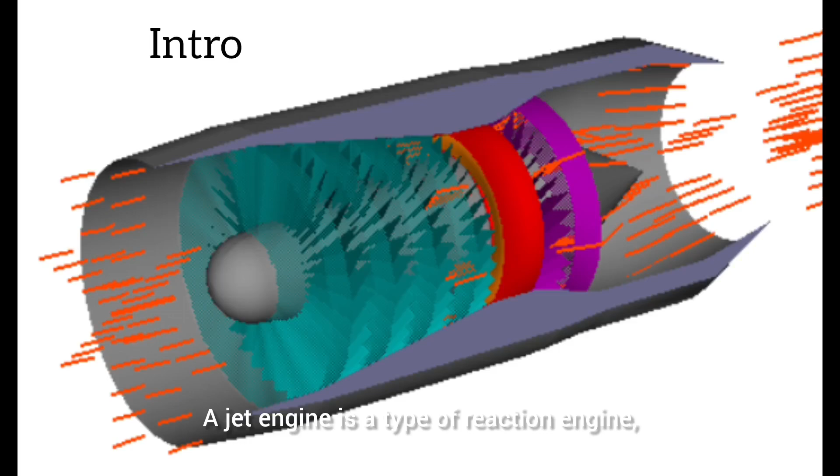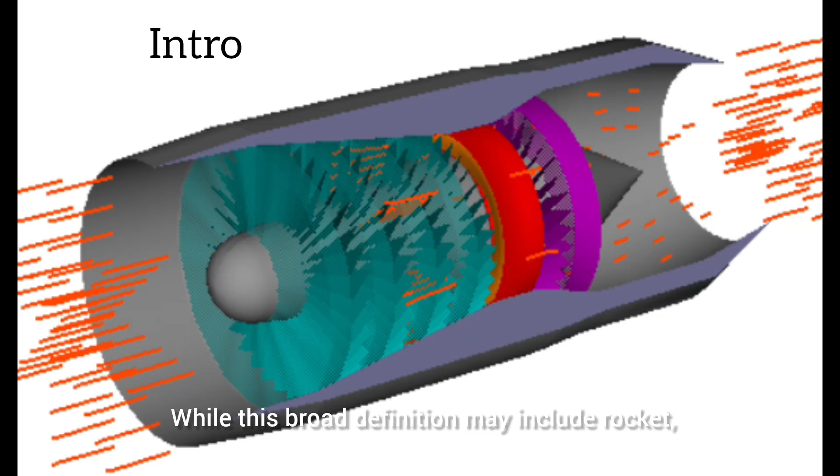A jet engine is a type of reaction engine, discharging a fast-moving jet of heated gas, usually air, that generates thrust by jet propulsion. While this broad definition may include rocket, water jet, and hybrid propulsion, the term jet engine typically refers to an internal combustion air-breathing jet engine such as a turbojet, turbofan, ramjet, pulse jet, or scramjet.

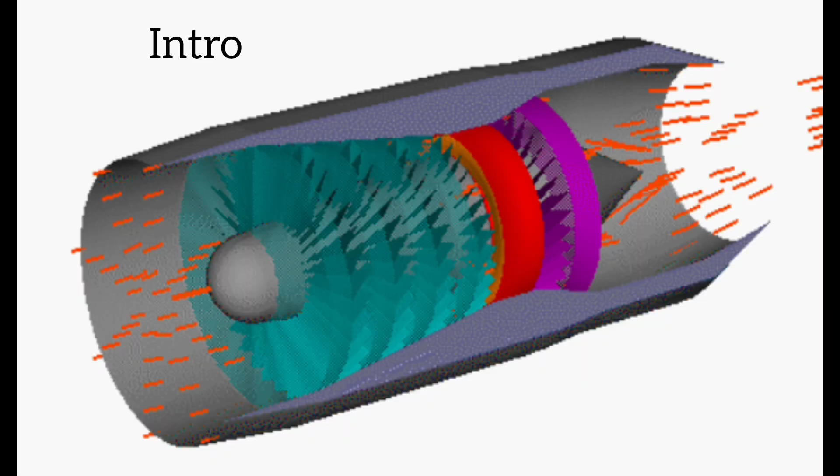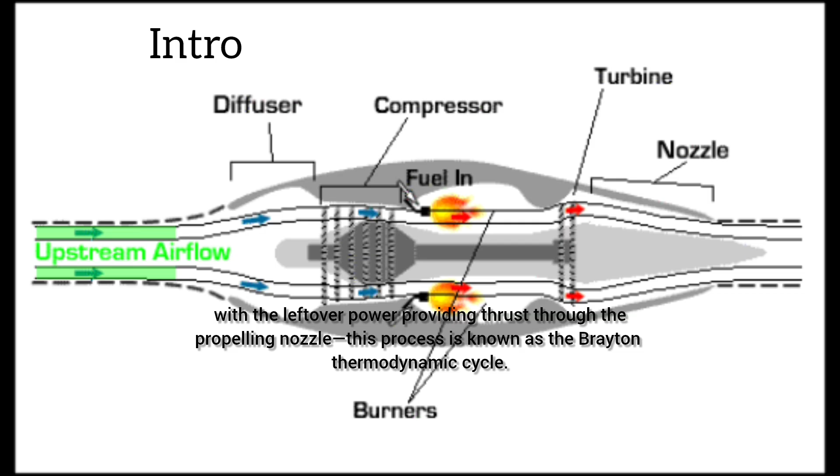In general, jet engines are internal combustion engines. Air-breathing jet engines typically feature a rotating air compressor powered by a turbine, with the leftover power providing thrust through the propelling nozzle. This process is known as the Brayton thermodynamic cycle. Jet aircraft use such engines for long-distance travel.

Early jet aircraft used turbojet engines that were relatively inefficient for subsonic flight. Most modern subsonic jet aircraft use more complex high-bypass turbofan engines. They give higher speed and greater fuel efficiency than piston and propeller aero engines over long distances. A few air-breathing engines made for high-speed applications, ramjets and scramjets, use the ram effect of the vehicle's speed instead of a mechanical compressor.

The thrust of a typical jetliner engine went from 5,000 lbf (22 kN), de Havilland Ghost turbojet, in the 1950s to 115,000 lbf (510 kN), General Electric GE90 turbofan, in the 1990s, and their reliability went from 40 in-flight shutdowns per 100,000 engine flight hours to less than 1 per 100,000 in the late 1990s.

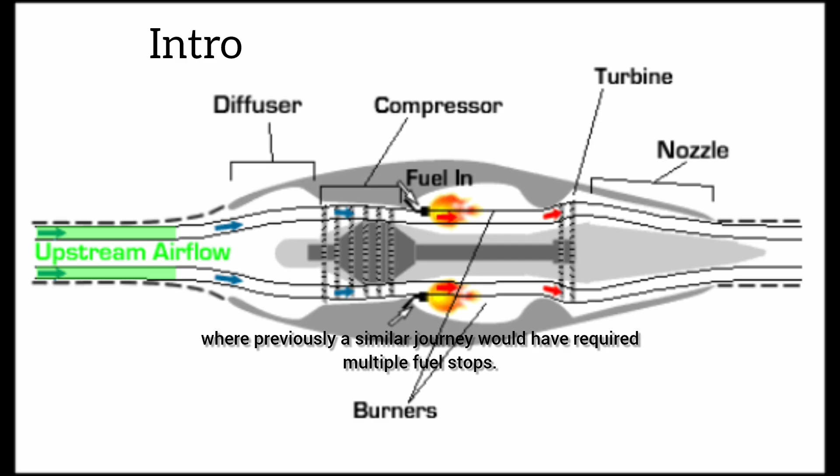This, combined with greatly decreased fuel consumption, permitted routine transatlantic flight by twin-engined airliners by the turn of the century, where previously a similar journey would have required multiple fuel stops. The principle of the jet engine is not new. However, the technical advances necessary to make the idea work did not come to fruition until the 20th century.

A rudimentary demonstration of jet power dates back to the aeolipile, a device described by Hero of Alexandria in 1st century Egypt. This device directed steam power through two nozzles to cause a sphere to spin rapidly on its axis. It was seen as a curiosity. Meanwhile, practical applications of the turbine can be seen in the water wheel and the windmill.

Historians have further traced the theoretical origin of the principles of jet engines to traditional Chinese firework and rocket propulsion systems. Such devices used for flight is documented in the story of Ottoman soldier Lagari Hasan Çelebi, who reportedly achieved flight using a cone-shaped rocket in 1633.

The earliest attempts at air-breathing jet engines were hybrid designs in which an external power source first compressed air, which was then mixed with fuel and burned for jet thrust. The Italian Caproni Campini N.1 and the Japanese Tsu-11 engine intended to power Ohka kamikaze planes towards the end of World War II were unsuccessful.

Even before the start of World War II, engineers were beginning to realize that engines driving propellers were approaching limits due to issues related to propeller efficiency, which declined as blade tips approached the speed of sound. If aircraft performance were to increase beyond such a barrier, a different propulsion mechanism was necessary. This was the motivation behind the development of the gas turbine engine, the most common form of jet engine.

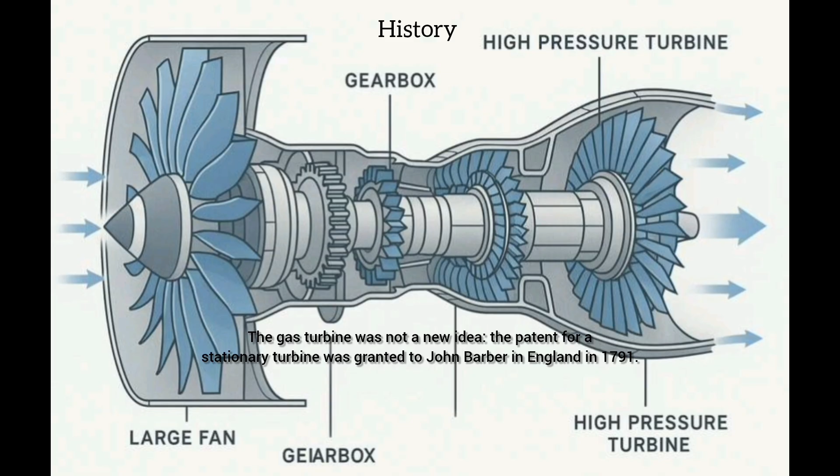The key to a practical jet engine was the gas turbine, extracting power from the engine itself to drive the compressor. The gas turbine was not a new idea. The patent for a stationary turbine was granted to John Barber in England in 1791. The first gas turbine to successfully run self-sustaining was built in 1903 by Norwegian engineer Ægidius Elling. Such engines did not reach manufacture due to issues of safety, reliability, weight and, especially, sustained operation.

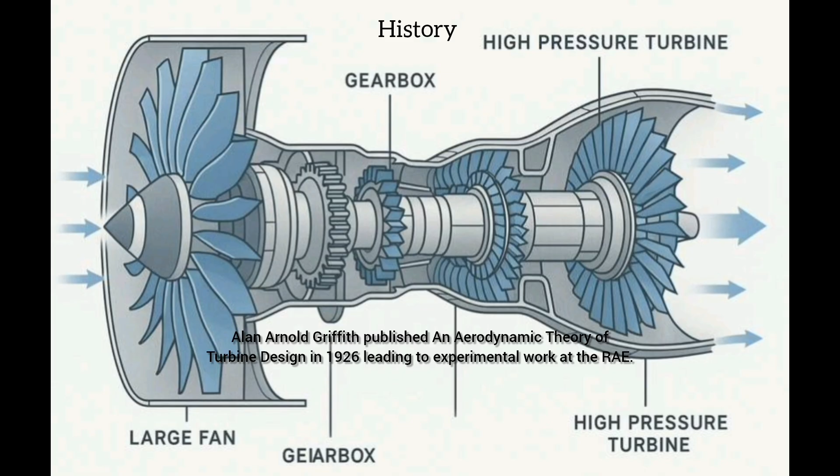The first patent for using a gas turbine to power an aircraft was filed in 1921 by Maxime Guillaume. His engine was an axial flow turbojet, but was never constructed, as it would have required considerable advances over the state-of-the-art in compressors. Alan Arnold Griffith published an aerodynamic theory of turbine design in 1926, leading to experimental work at the RAE. In 1928, RAF College Cranwell cadet Frank Whittle formally submitted his ideas for a turbojet to his superiors.

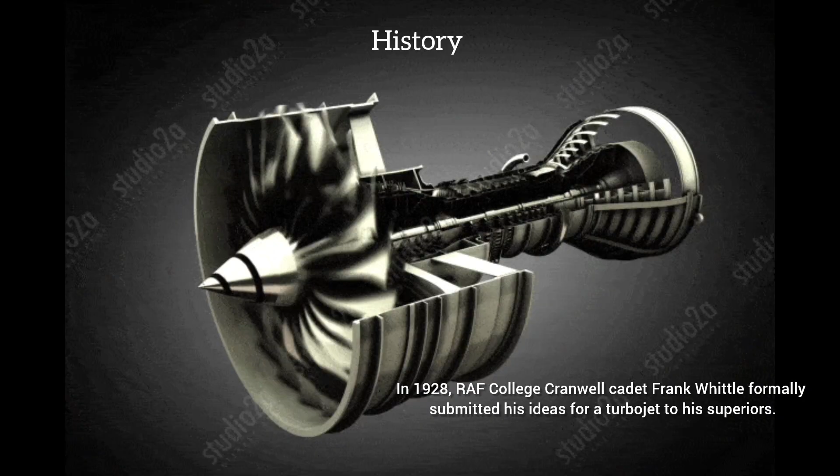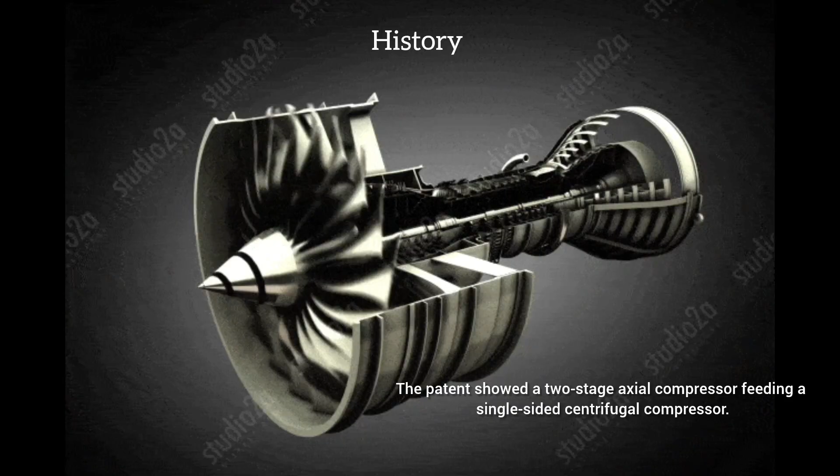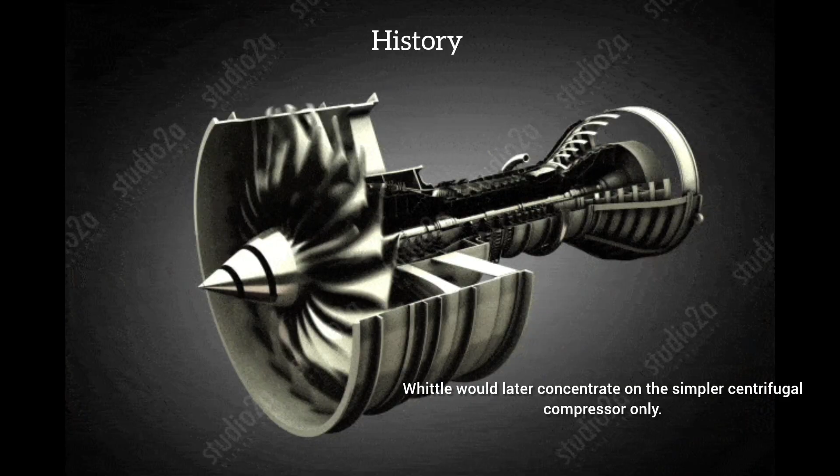In October 1929, he developed his ideas further. On the 16th of January, 1930, in England, Whittle submitted his first patent, granted in 1932. The patent showed a two-stage axial compressor feeding a single-sided centrifugal compressor. Practical axial compressors were made possible by ideas from A. A. Griffith in a seminal paper in 1926, An Aerodynamic Theory of Turbine Design. Whittle would later concentrate on the simpler centrifugal compressor only.

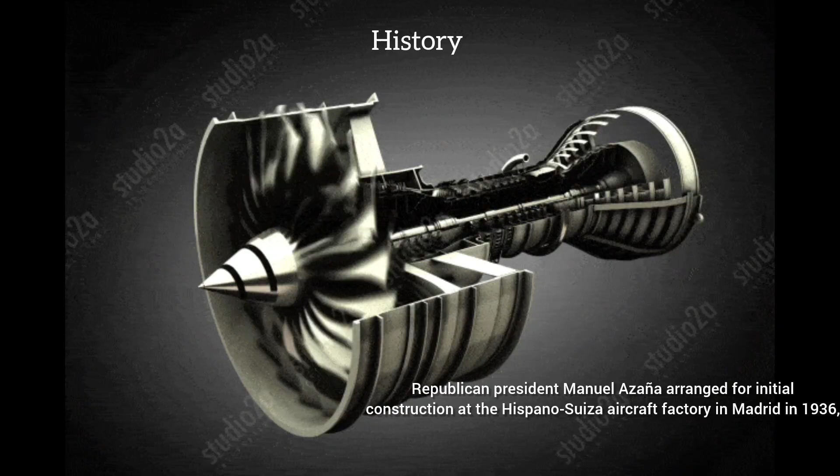Whittle was unable to interest the government in his invention, and development continued at a slow pace. In Spain, pilot and engineer Virgilio Leret Ruiz was granted a patent for a jet engine design in March 1935. Republican President Manuel Azaña arranged for initial construction at the Hispano-Suiza aircraft factory in Madrid in 1936.

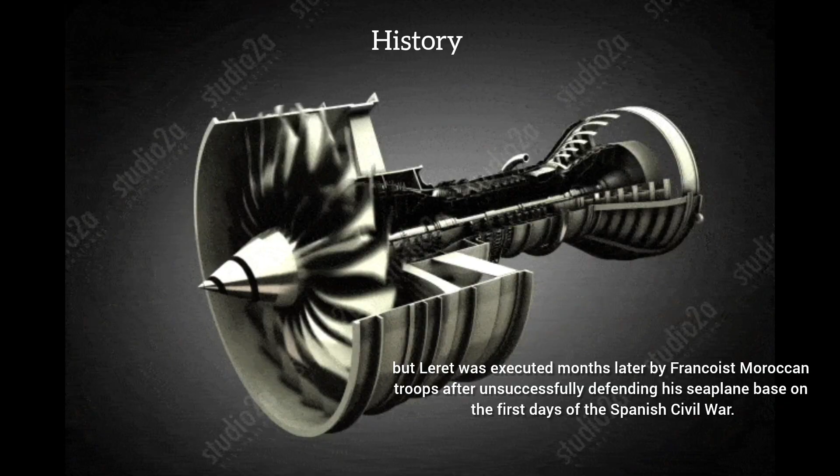But Leret was executed months later by Francoist Moroccan troops after unsuccessfully defending his seaplane base on the first days of the Spanish Civil War. His plans, hidden from Francoists, were secretly given to the British Embassy in Madrid a few years later by his wife, Carlotta O'Neill, upon her release from prison.

In 1935, Hans von Ohain started work on a similar design to Whittle's in Germany, both compressor and turbine being radial, on opposite sides of the same disc. Initially unaware of Whittle's work, von Ohain's first device was strictly experimental and could run only under external power, but he was able to demonstrate the basic concept.

Ohain was then introduced to Ernst Heinkel, one of the larger aircraft industrialists of the day, who immediately saw the promise of the design. Heinkel had recently purchased the Hirth Engine Company, and Ohain and his master machinist Max Hahn were set up there as a new division of the Hirth Company. They had their first HeS 1 centrifugal engine running by September 1937. Unlike Whittle's design, Ohain used hydrogen as fuel, supplied under external pressure.

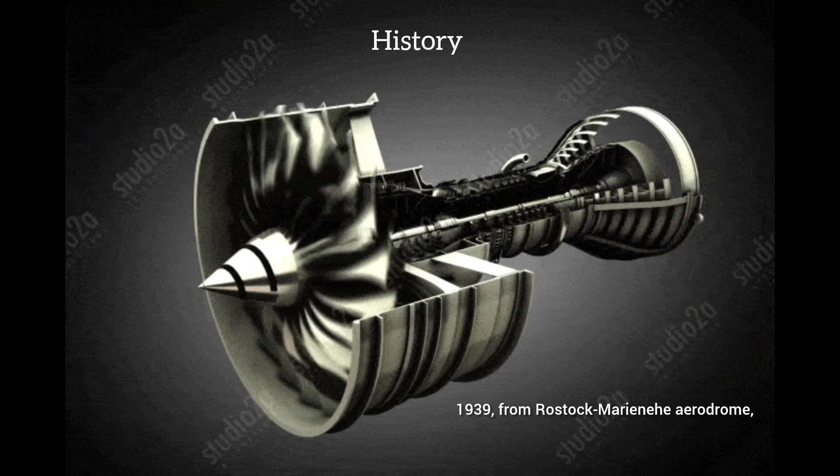Their subsequent designs culminated in the gasoline-fueled HeS 3 of 5 kN, 1,100 lbf, which was fitted to Heinkel's simple and compact He 178 airframe and flown by Erich Warsitz in the early morning of August 27, 1939, from Rostock-Marienehe Aerodrome. An impressively short time for development. The He 178 was the world's first jet plane.

Heinkel applied for a U.S. patent covering the aircraft power plant by Hans Joachim Pabst von Ohain on May 31, 1939, patent number US 2256198, with M. Hahn referenced as inventor. Von Ohain's design, an axial flow engine, as opposed to Whittle's centrifugal flow engine.

Austrian Anselm Franz of Junkers Engine Division, Junkers Motoren or JUMO, introduced the axial flow compressor in their jet engine. JUMO was assigned the next engine number in the RLM 109-0XX numbering sequence for gas turbine aircraft power plants, 004, and the result was the JUMO 004 engine.

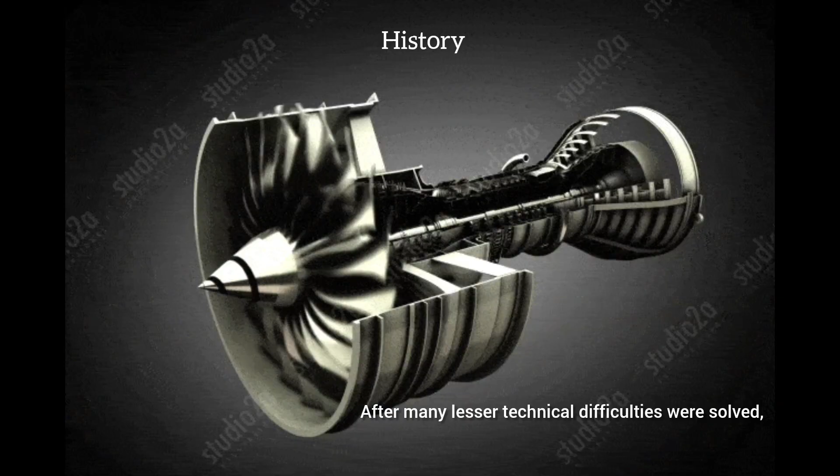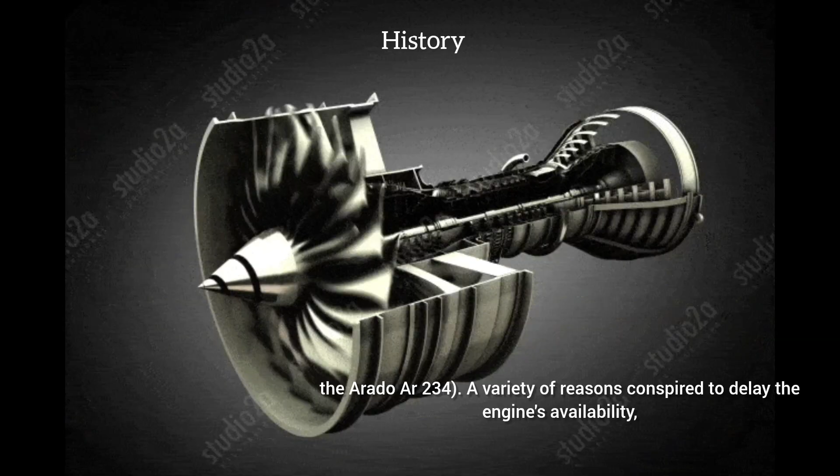After many lesser technical difficulties were solved, mass production of this engine started in 1944 as a power plant for the world's first jet fighter aircraft, the Messerschmitt Me 262, and later the world's first jet bomber aircraft, the Arado Ar 234. A variety of reasons conspired to delay the engine's availability, causing the fighter to arrive too late to improve Germany's position in World War II. However, this was the first jet engine to be used in service.

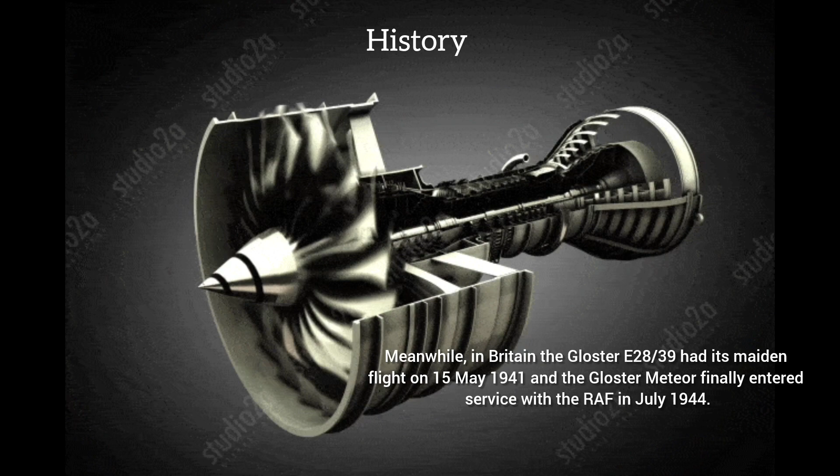Meanwhile, in Britain the Gloster E.28/39 had its maiden flight on the 15th of May, 1941, and the Gloster Meteor finally entered service with the RAF in July 1944. These were powered by turbojet engines from Power Jets Limited, set up by Frank Whittle.

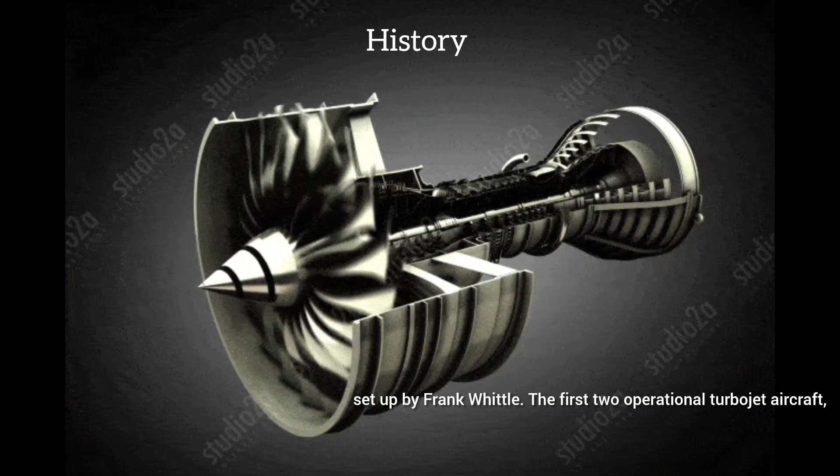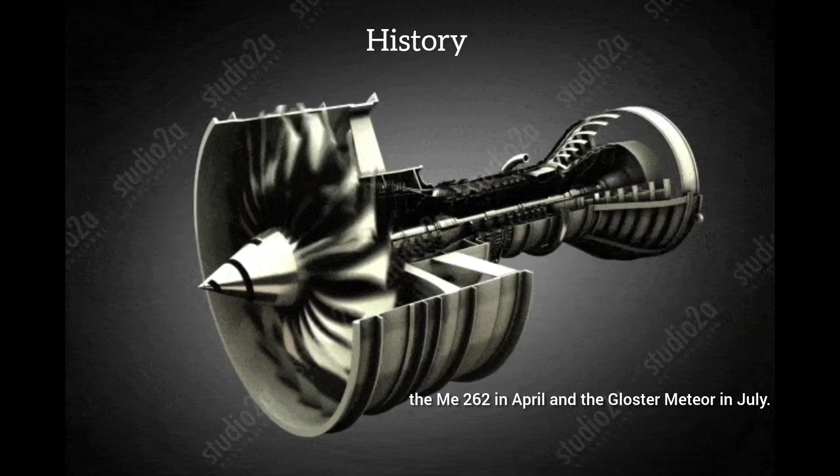The first two operational turbojet aircraft, the Messerschmitt Me 262 and then the Gloster Meteor, entered service within 3 months of each other in 1944. The Me 262 in April and the Gloster Meteor in July. The Meteor only saw around 15 aircraft enter World War II action, while up to 1,400 Me 262 were produced, with 300 entering combat, delivering the first ground attacks and air combat victories of jet planes.

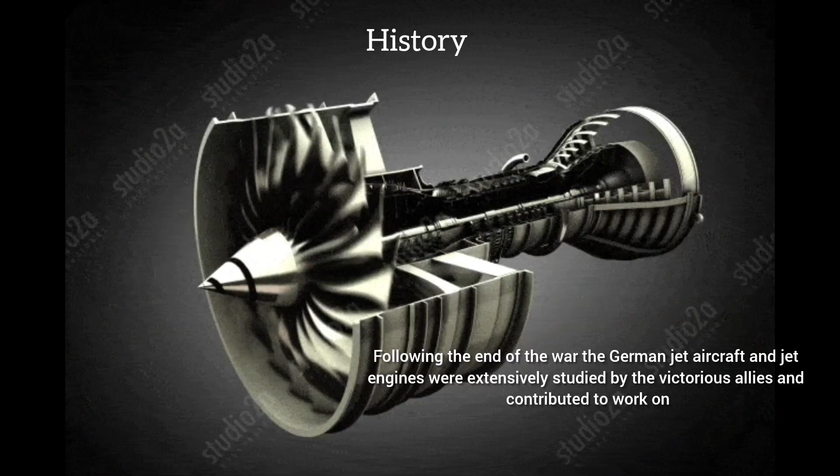Following the end of the war, the German jet aircraft and jet engines were extensively studied by the victorious Allies and contributed to work on early Soviet and US jet fighters. The legacy of the axial flow engine is seen in the fact that practically all jet engines on fixed-wing aircraft have had some inspiration from this design.

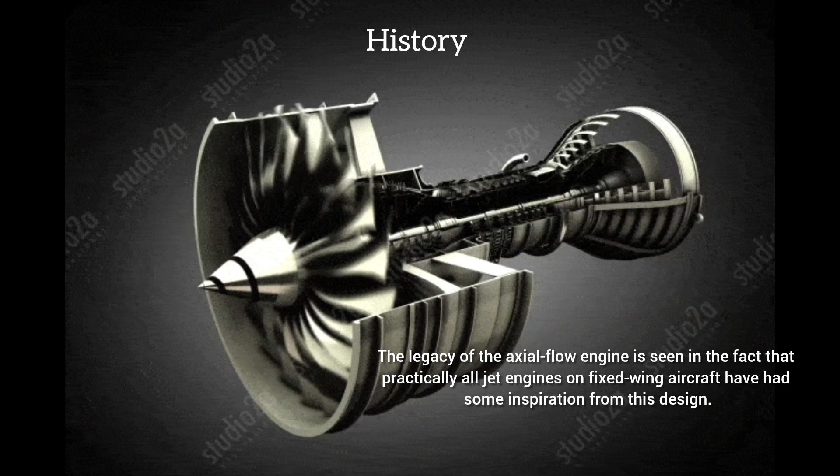By the 1950s, the jet engine was almost universal in combat aircraft, with the exception of cargo, liaison, and other specialty types. By this point, some of the British designs were already cleared for civilian use, and had appeared on early models like the de Havilland Comet and Avro Canada Jetliner. By the 1960s, all large civilian aircraft were also jet-powered, leaving the piston engine in low-cost niche roles such as cargo flights.

The efficiency of turbojet engines was still rather worse than piston engines. But by the 1970s, with the advent of high-bypass turbofan jet engines, an innovation not foreseen by the early commentators such as Edgar Buckingham, at high speeds and high altitudes that seemed absurd to them, fuel efficiency was about the same as the best piston and propeller engines.

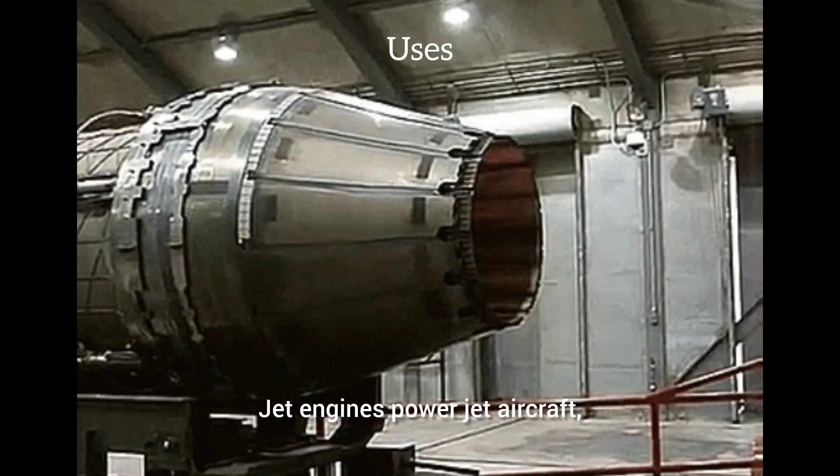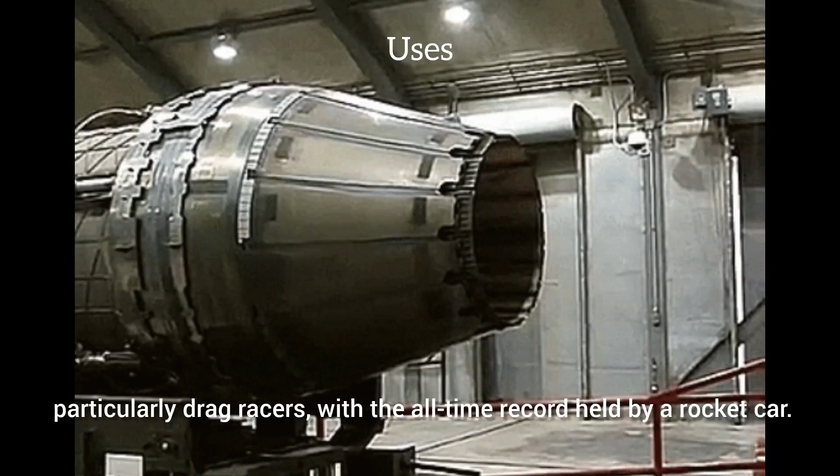Jet engines power jet aircraft, cruise missiles, and unmanned aerial vehicles. In the form of rocket engines, they power model rocketry, spaceflight, and military missiles. Jet engines have propelled high-speed cars, particularly drag racers, with the all-time record held by a rocket car. A turbofan-powered car, Thrust SSC, currently holds the land speed record. Jet engine designs are frequently modified for non-aircraft applications, as industrial gas turbines or marine power plants.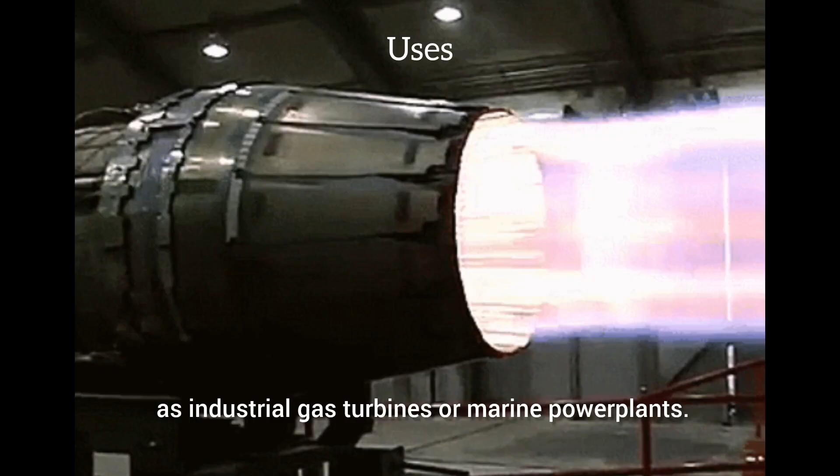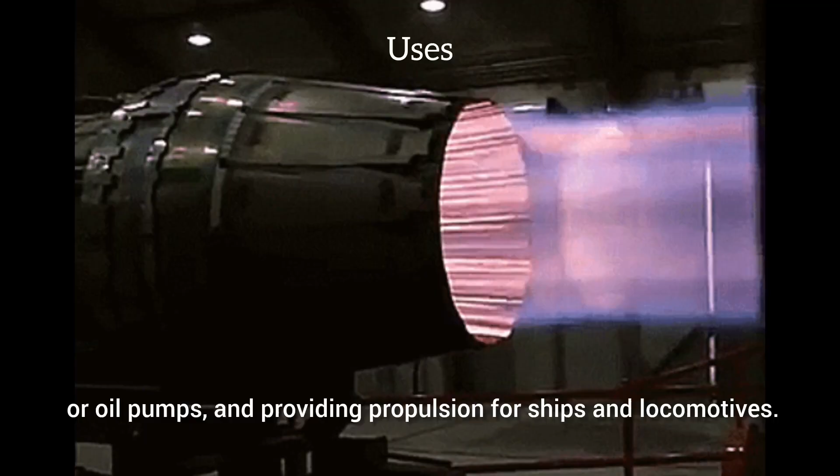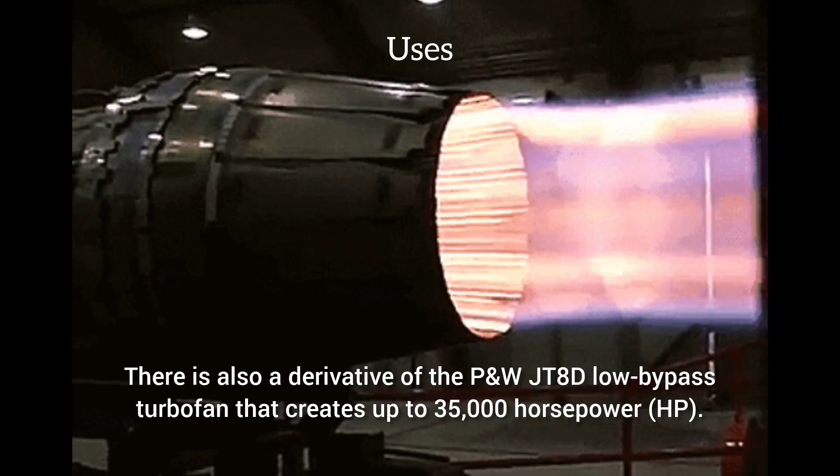These are used in electrical power generation, for powering water, natural gas, or oil pumps, and providing propulsion for ships and locomotives. Industrial gas turbines can create up to 50,000 shaft horsepower. Many of these engines are derived from older military turbojets such as the Pratt & Whitney J57 and J75 models. There is also a derivative of the P&W JT8D low-bypass turbofan that creates up to 35,000 horsepower (HP).

Jet engines are also sometimes developed into, or share certain components such as engine cores, with turboshaft and turboprop engines, which are forms of gas turbine engines that are typically used to power helicopters and some propeller-driven aircraft.

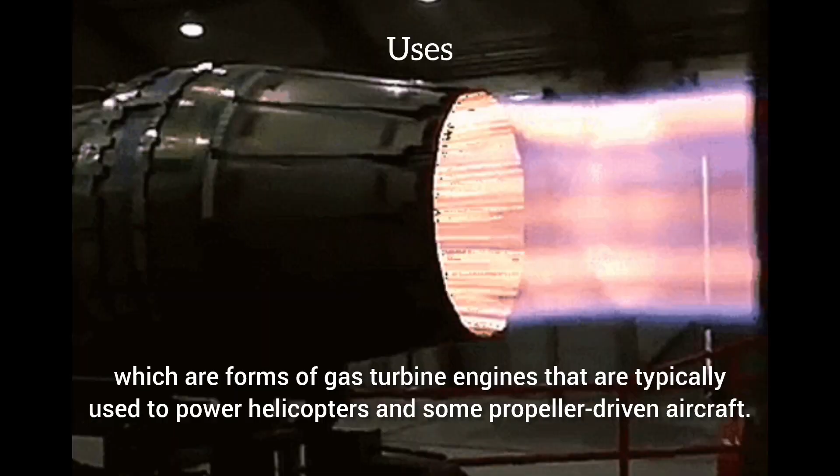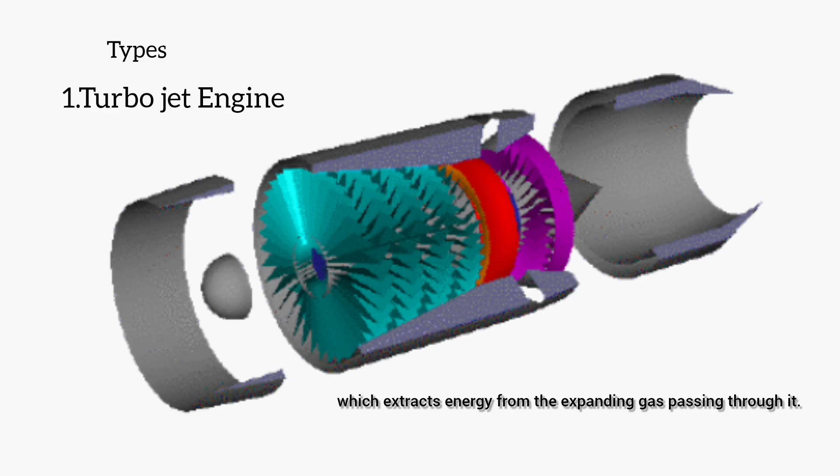A turbojet engine is a gas turbine engine that works by compressing air with an inlet and a compressor (axial, centrifugal, or both), mixing fuel with the compressed air, burning the mixture in the combustor, and then passing the hot, high-pressure air through a turbine and a nozzle. The compressor is powered by the turbine, which extracts energy from the expanding gas passing through it. The engine converts internal energy in the fuel to increased momentum of the gas flowing through the engine, producing thrust. All the air entering the compressor is passed through the combustor and turbine, unlike the turbofan engine described below.

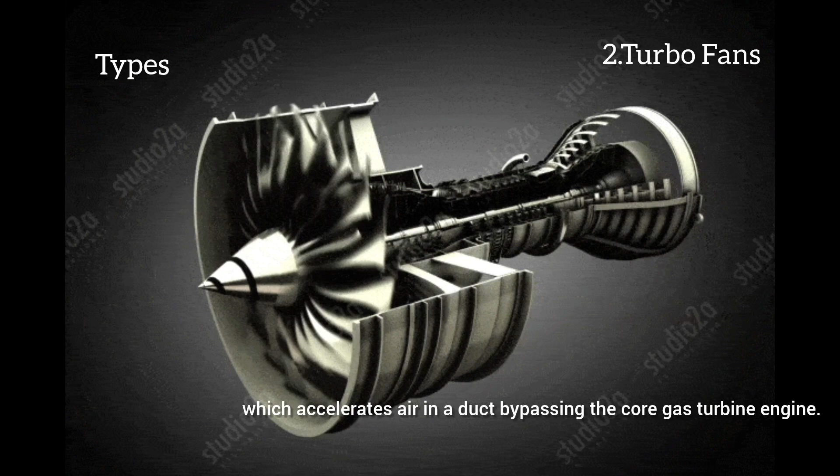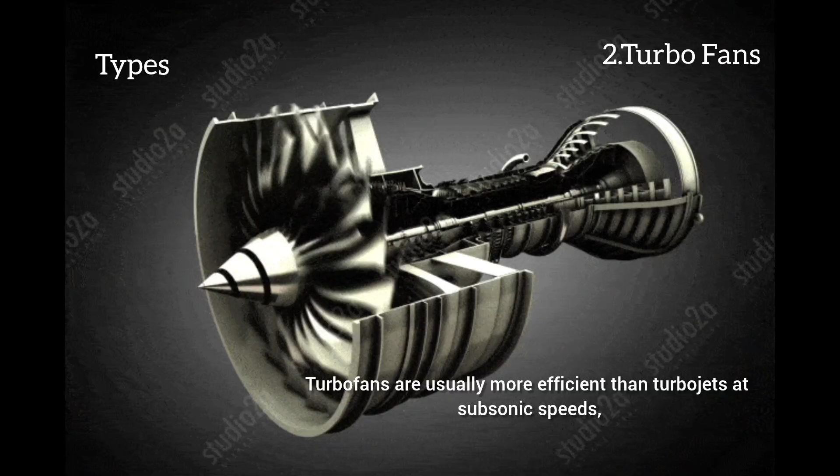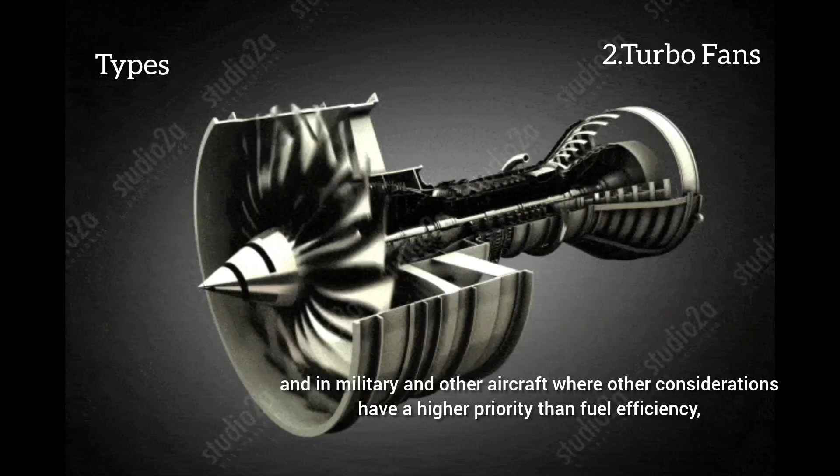Turbofans differ from turbojets in that they have an additional fan at the front of the engine, which accelerates air in a duct bypassing the core gas turbine engine. Turbofans are the dominant engine type for medium and long-range airliners. Turbofans are usually more efficient than turbojets at subsonic speeds, but at high speeds their large frontal area generates more drag. Therefore, in supersonic flight, and in military and other aircraft where other considerations have a higher priority than fuel efficiency, fans tend to be smaller or absent.

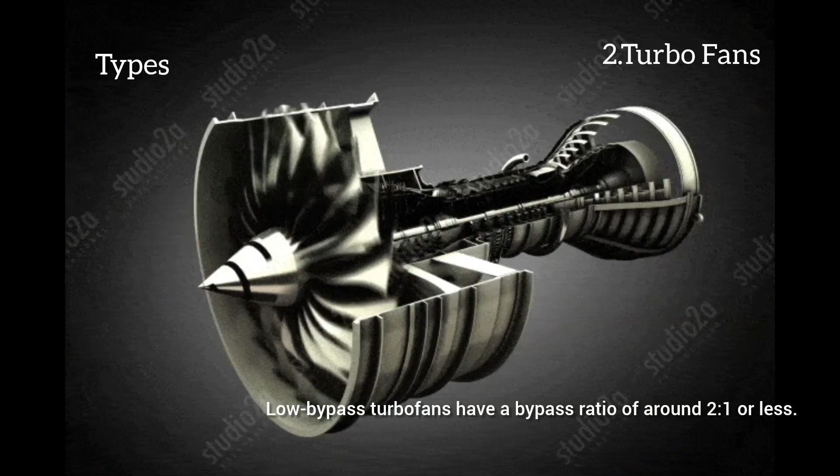Because of these distinctions, turbofan engine designs are often categorized as low bypass or high bypass, depending upon the amount of air which bypasses the core of the engine. Low bypass turbofans have a bypass ratio of around 2:1 or less.

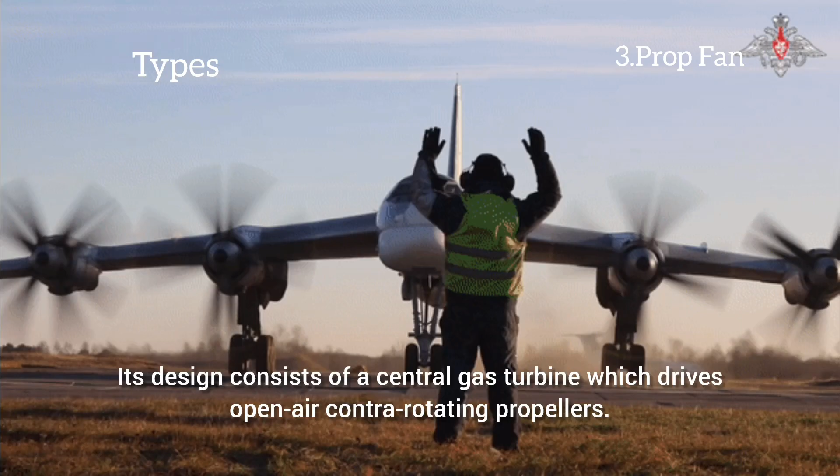A propfan engine is a type of air-breathing jet engine which combines aspects of turboprop and turbofan. Its design consists of a central gas turbine which drives open-air contra-rotating propellers. Unlike turboprop engines, in which the propeller and the engine are considered two separate products, the propfan's gas generator and its unshrouded propeller module are heavily integrated and are considered to be a single product. Additionally, the propfan's short, heavily twisted variable pitch blades closely resemble the ducted fan blades of turbofan engines.

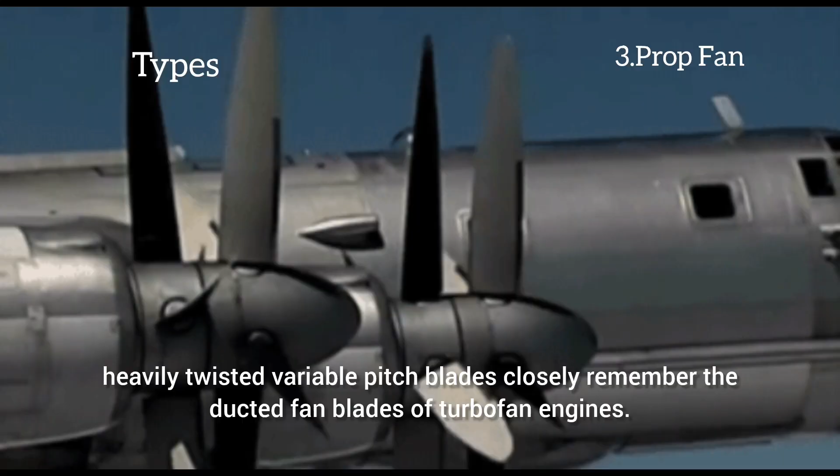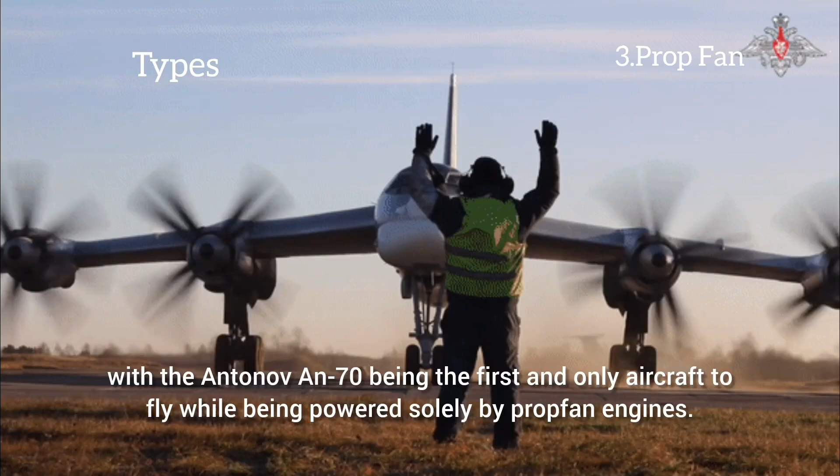Propfans are designed to offer the speed and performance of turbofan engines with the fuel efficiency of turboprops. However, due to low fuel costs and high cabin noise, early propfan projects were abandoned. Very few aircraft have flown with propfans, with the Antonov An-70 being the first and only aircraft to fly while being powered solely by propfan engines.

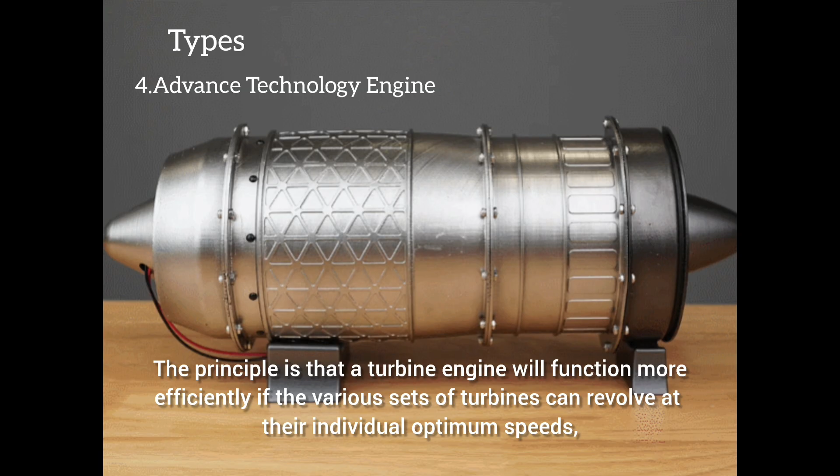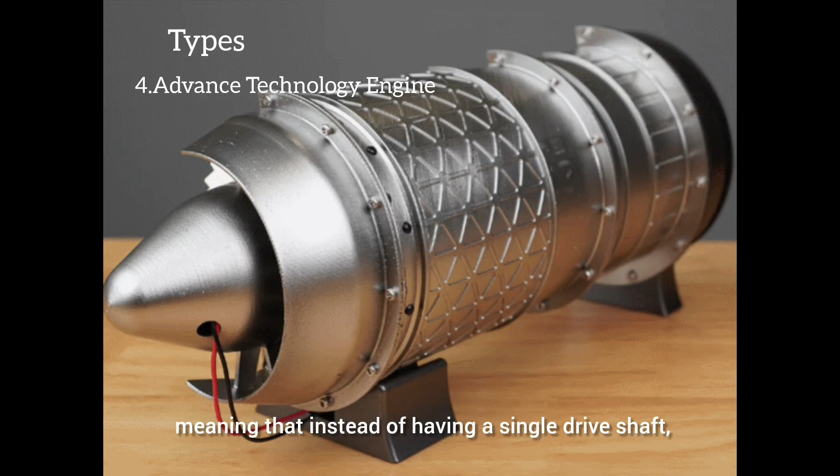The term advanced technology engine refers to the modern generation of jet engines. The principle is that a turbine engine will function more efficiently if the various sets of turbines can revolve at their individual optimum speeds, instead of at the same speed. The true advanced technology engine has a triple spool, meaning that instead of having a single drive shaft, there are three, in order that the three sets of blades may revolve at different speeds. An interim state is a twin-spool engine, allowing only two different speeds for the turbines.

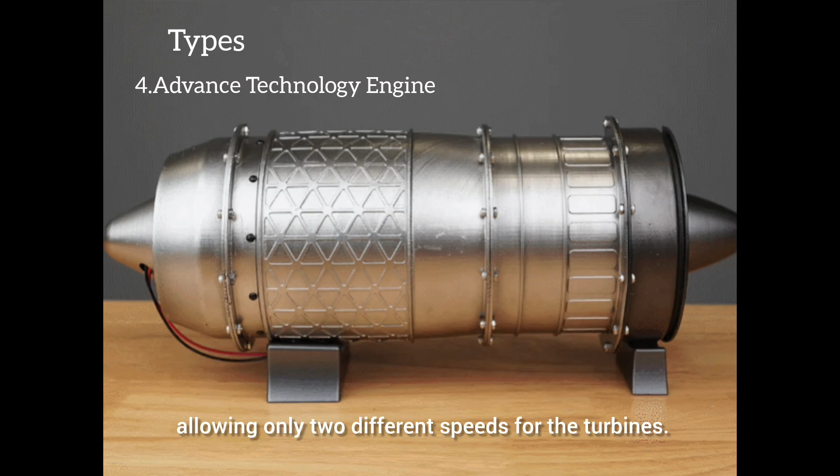Ram compression jet engines are air-breathing engines similar to gas turbine engines insofar as they both use the Brayton cycle. Gas turbine and ram compression engines differ, however, in how they compress the incoming airflow. Whereas gas turbine engines use axial or centrifugal compressors to compress incoming air, ram engines rely only on air compressed in the inlet or diffuser. A ram engine thus requires a substantial initial forward airspeed before it can function.

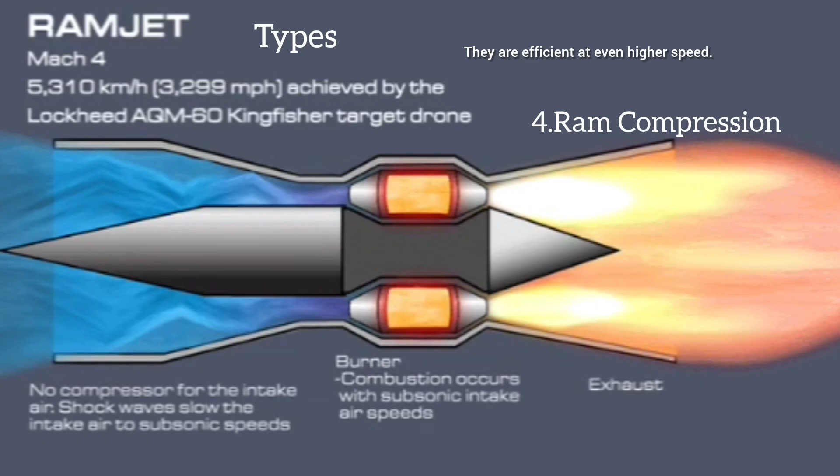Ramjets are considered the simplest type of air-breathing jet engine because they have no moving parts in the engine proper, only in the accessories. Scramjets differ mainly in the fact that the air does not slow to subsonic speeds. Rather, they use supersonic combustion. They are efficient at even higher speed. Very few have been built or flown.

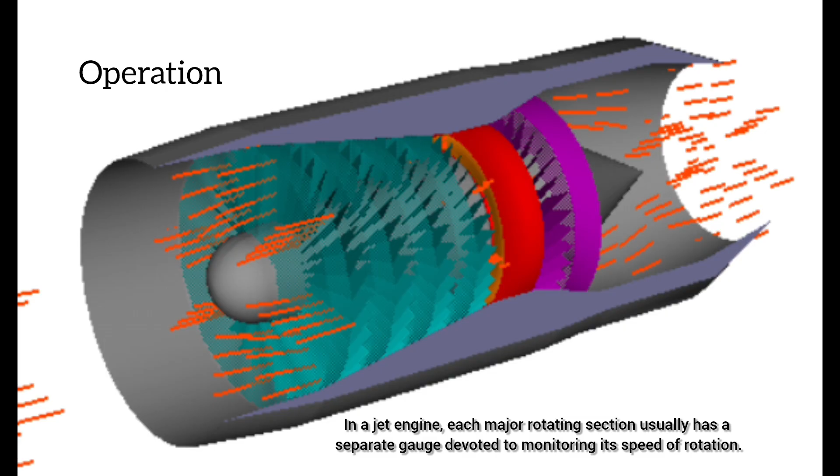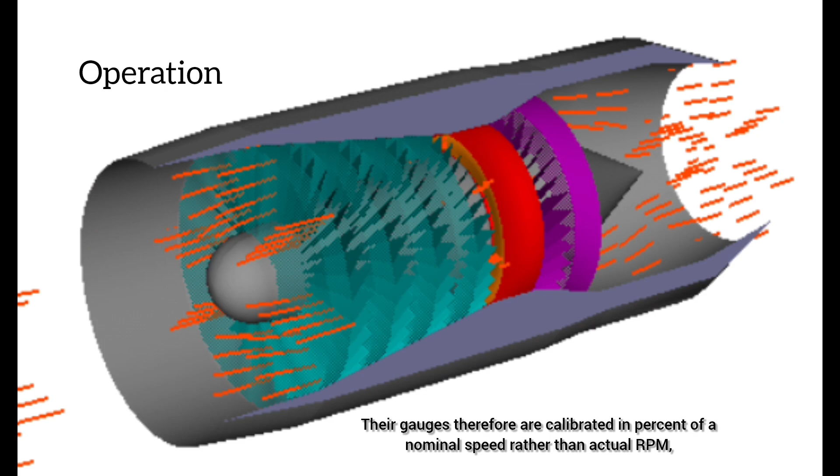In a jet engine, each major rotating section usually has a separate gauge devoted to monitoring its speed of rotation. Depending on the make and model, a jet engine may have an N1 gauge that monitors the low-pressure compressor section and/or fan speed in turbofan engines. The gas generator section may be monitored by an N2 gauge, while triple spool engines may have an N3 gauge as well. Each engine section rotates at many thousands RPM. Their gauges therefore are calibrated in % of a nominal speed rather than actual RPM, for ease of display and interpretation.